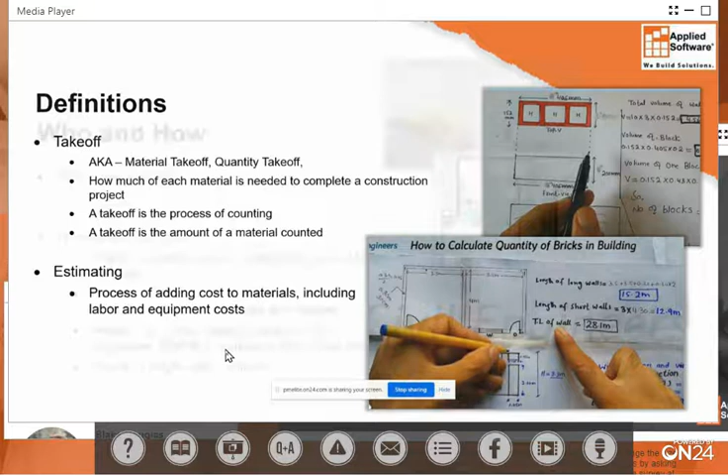It's important that we also associate costs with labor and any equipment. There are many factors involved in estimating, but we need to start out with our drawings and our models to start generating our estimates.

Who uses Takeoff? Estimators and contractors, could be subs or general contractors. Designers typically using modeling software like Revit or Fabrication, Evolve, can get a lot of takeoffs directly from their software. But estimators and contractors don't know how to use Evolve or possibly Revit. So Takeoff is a good way for customers to take advantage of these information-rich BIM models and get quantities from them.

Forever we've done takeoffs using paper, where we just highlight things in color. We've done 2D takeoffs with PDFs. We asked a question earlier about what software you've used in the past, if any. Very common PDFs were used, and electronically you can use different colors and symbols to highlight what's been counted. On the 3D side, you're able to count objects as well.

But again, estimators don't know Revit. So if you don't know Revit, it's hard to get the estimates or quantifications out of it. That's where Takeoff comes in. We can count things like individual objects, lengths, area, and volume.

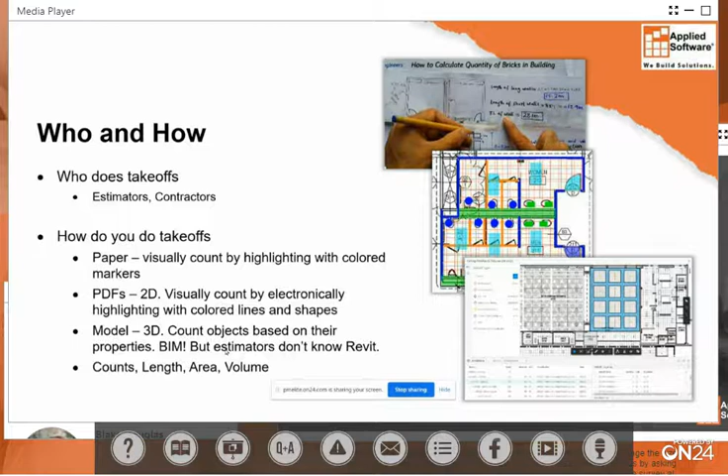The product we're going to talk about today is Autodesk Takeoff. Takeoff is part of the Autodesk Construction Cloud, made up of 4 primary products. Everything starts with Docs, which houses your documents. From there, we can do design collaboration and model coordination using BIM Collaborate. We'll focus on Takeoff today, and I'll show you both 2D and 3D takeoffs. Then there's Build, used on the construction side for managing your project.

Let's first look at setting up Takeoff, and it's pretty easy. You just need to be invited to a project. You'll log into acc.autodesk.com. Let me take a step back - you need to be an administrator for a project. If it's not already set up, as an administrator you can set up a project, or if you're invited to it, you can simply log in. A project does need to be created, and once selected, team members need to be invited.

We then need to configure some settings before we start using Takeoff. From there, I can do takeoffs on either 2D sheets or 3D models, and we create packages to organize what we're counting. Bid packages you can think of like scopes of work. Then we'll perform our quantity takeoff, and finally finish with exporting what we've quantified so we can use that in estimating.

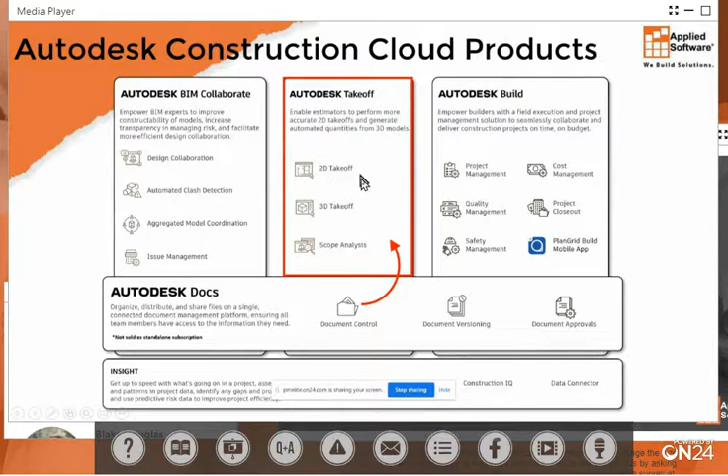So again, I'm looking back at my project, and I see that I'm in Docs. I'll come up here and switch from Docs to Takeoff. This does have to be turned on and activated for people to be able to see it. Once you see Takeoff, you can select it, and it opens up a new interface specifically for Autodesk Takeoff.

You'll notice I've got my help button up here, and I encourage you to review that. You'll also notice I have a menu specifically for Takeoff. It's a little different than what we saw for Docs, so we'll go through a few features here. The very first time you set up Takeoff, you'll get to this first page called Getting Started.

This basically takes you through steps for setting up Takeoff. We first start by setting up a classification system and units of measure. We then upload or publish 2D sheets and 3D models. Finally, we create packages to do our takeoffs. We'll go through those steps, show that quickly here, and review them within the live session.

First thing, we'll start out with defining a classification system. When I do that, it takes me to a new screen, and from here I'm going into settings. Then I pick which units of measure I want to work with, and typically here in the US we work with Imperial. From here I can upload a particular classification system.

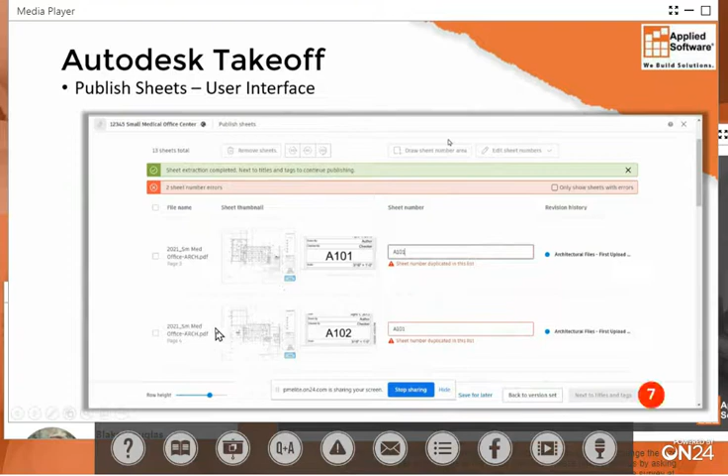By the way, I could also control the height of each row. And finally, I'm just going to move on. After I correct the number, I'll move on to the next step.

I did want to show you one other thing here that I had the option to do. This is a PDF document, and in that PDF document, the first 2 pages is nothing more than a picture of a 3D model. I can't do anything with that for quantification, so I have the option to put a check in there and remove those sheets.

Now I can go ahead and move on to my titles, and make sure the titles - actually one more step here, a little tip I put in. You will notice that it tells me I can proceed on, but you may want to spot check your sheet numbers.

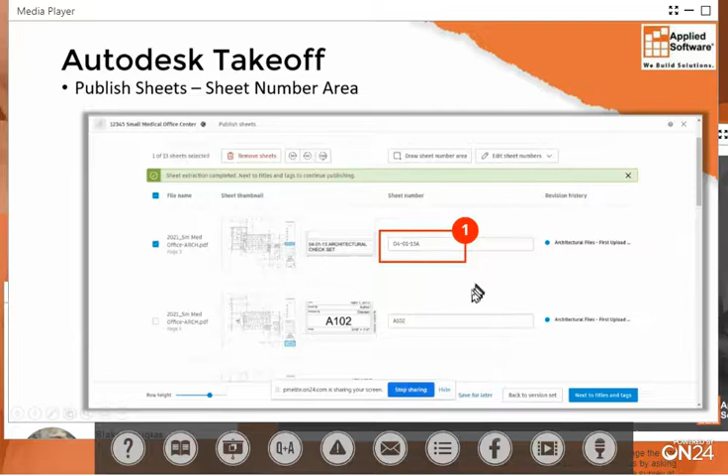Notice it placed the date instead of a sheet number, so it recognized that as being correct as far as being a number, but it's not the correct sheet number. So it's important that we quickly verify the data that is there. I'm going to go ahead and proceed on.

And what we're looking at here is the ability where I can tell it where to find the sheet number, so it knows the correct location to look for it. I'm going to proceed on because I'll go through that a little bit slower for our sheet titles.

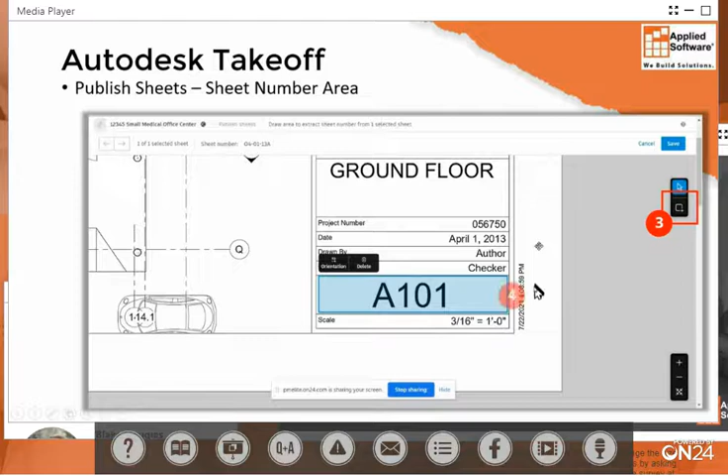When I complete this, it does recognize the sheet number, so now I can proceed on to titles. Now, while it does a great job of finding the sheet numbers and labeling that here in these columns, the sheet titles - we have to tell it specifically where to find the sheet titles.

So one of the first things I would do here is looking for sheet titles, is maybe adjust the row height so I can see more rows. I can select all the files in which I want to look for the title. From there, once I select them, I could hit this box that says Draw Sheet Title Area.

When I do that, it now brings up a sheet, one of the sheets, and it's asking me to specify an area where to look for the title. Now, if you notice right up here, it tells you - there's some little tips in here that are really easy to miss, but it tells you right here to draw an area to extract the sheet title from all 13 sheets that I have selected.

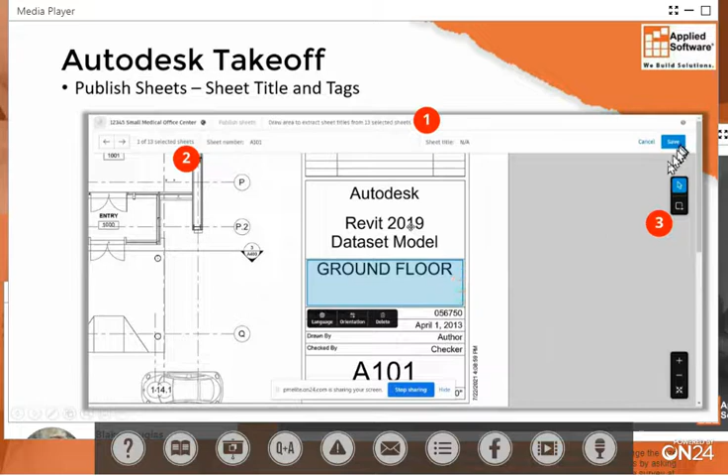Now, I'm on sheet number 1, but I could be on any sheet - all of them will look in the same general area. What I do is simply select this button right over here, pick 2 corners, and it'll find the sheet title. When I proceed on, I'll hit Save, and then we'll see on the next screen that it's recognized the sheet titles. And then I'll hit Publish Sheets.

So when you publish PDF documents into Takeoff, there's a little bit of work that we have to do. It really doesn't take very long, but once it finishes, then we'll end up seeing the 2D sheets appear. The 3D models go a little bit quicker. With the 3D models, again, I can go back over to Files. I can select multiple Revit models, and when I hit Publish, it will automatically publish those 2 Revit models. There's no other work I need to do.

Again, the Revit models have information, they have intelligence about them, whereas the PDF document has no information. We say it's kind of a dumbed down PDF where all I have is the sheet number and the sheet name and what's written on there. But if I touch on an object, there's no properties associated with that object. A line with an arc is just a line with an arc in a PDF, but in a Revit model, that line with an arc could be a door.

So now that I've set up my documents, now I create a package. And when I select the packages, it'll take me over to the package section, and I can create a package. And you want your packages to be pretty focused on what you're going to quantify. So in this case here, if I want to generate some work packages for flooring and for walls, then I can create packages for each.

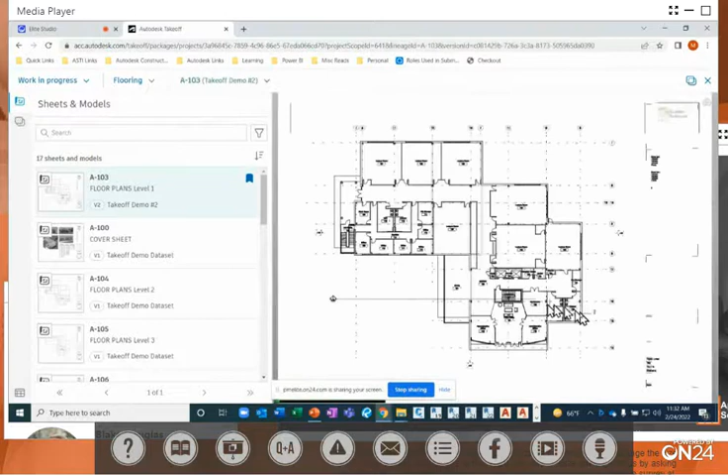So if I come over here and I'm going to select just my first floor, and I'll just zoom in real quick to this area. I'll switch back over to my takeoffs, and I'm going to assume that the majority of this area here has been replaced with carpeting. So I can come over here and I'll select my carpet takeoff. And now right down here, and actually let me move this over to here. Make sure I start my area routine, and with carpet selected, I can come up here and I could select this entire area, and that's going to be carpeting.

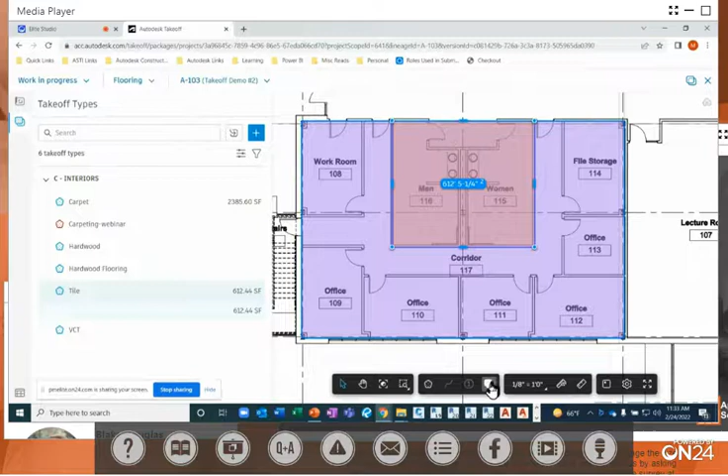Now, I'm not going to put carpeting in the men's room, and maybe not in my workroom, or maybe in some of my offices. So I'll come down here and I'll switch over to tile, and I'll do the exact same thing, and I'll specify an area where to place my tile. Now, when I did that, it didn't change my carpeting. So a nice little feature here, I can select on that tile, and I come right down here and I could say cut out. And when I do that now, if I take this, oops, it's actually cut out that section of area.

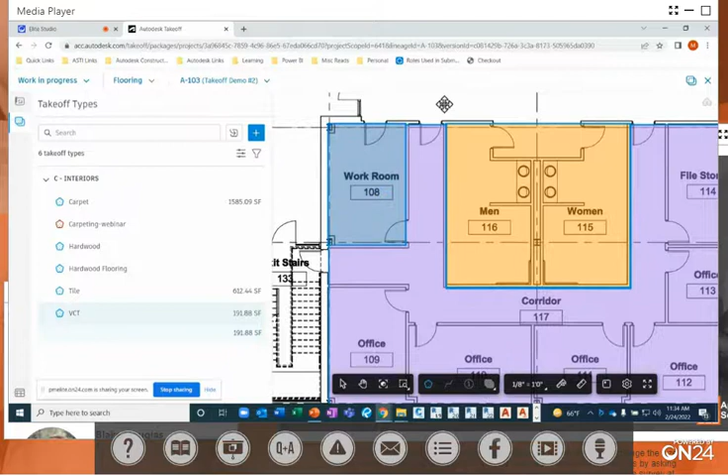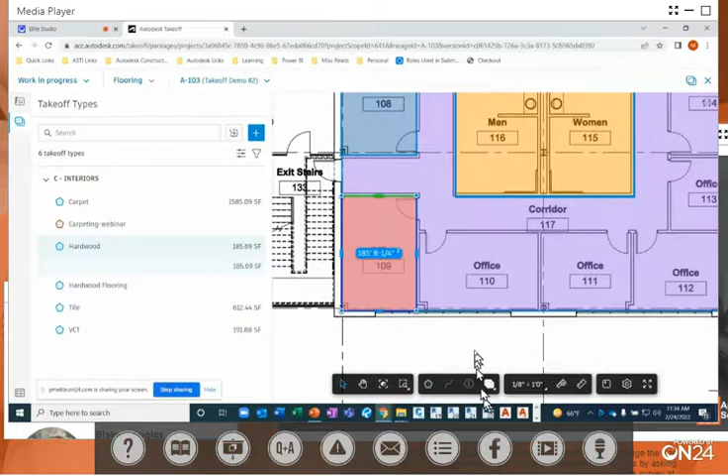So maybe in my workroom, I'll put in VCT, and I'll just do this. And again, I'll do a quick cutout for my VCT. Oops. Escape there, still in there. So very quickly, you can see I'm quantifying now how much VCT, tile, and carpet I have. And finally, I'll just finish this up with hardwood. And I'll just say that in this corner office, we're going to put hardwood. And because I put hardwood in there, I'm going to go ahead and expand that a little bit more. And then I'll just say, cut that out.

And actually, it looks like we found a little bug there. So I'll have to come back there and add my carpet, but what I think I did was I accidentally selected the carpet. Let me just demonstrate that real quick here, guys. It's actually a good thing to point out. When you select on an object, make sure you don't select the wrong object. I'd actually accidentally selected the carpet. So now when I come in here and I select on this hardwood, I can go ahead and remove that. I can click on the workroom and I can remove that.

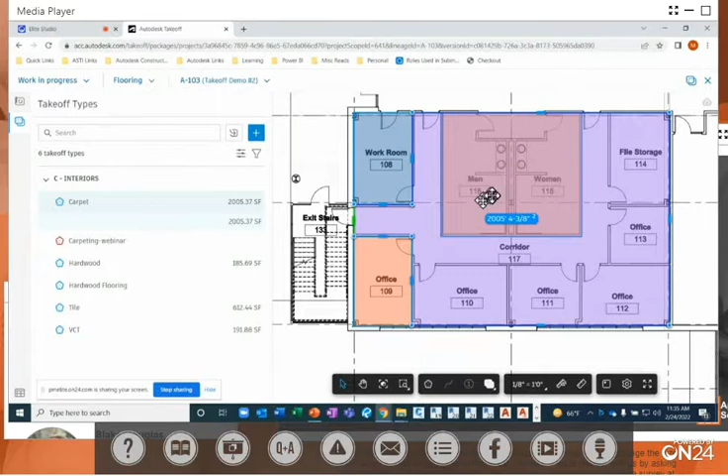And one other thing I can do, I had a little tough time selecting if they're overlapping. You can come over here and I could turn off this carpeting here. I'll turn that off. Now I come in here and I can actually select on that tile, or I also have the option, if I need to select on it, I don't know why, but my mouse is stuck here. I also have the option where I can actually select on the tile this way. And sorry, my mouse is actually stuck, so I apologize for that. So we're going to go ahead and turn that off real quick. I'm going to select that, turn that back on, and then I'll go ahead and cut that out.

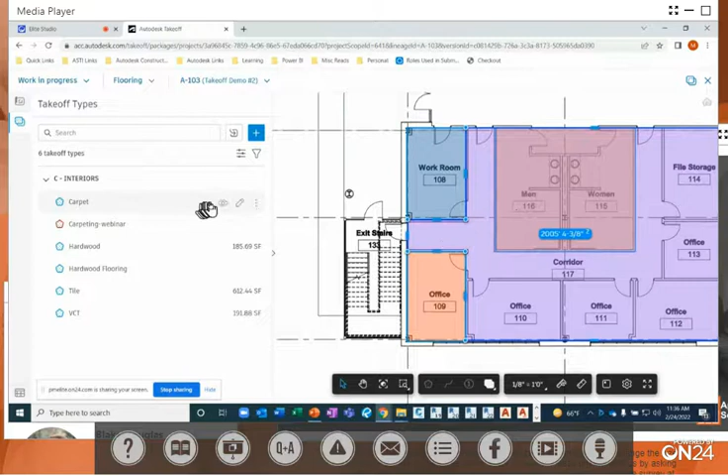And actually, it's not letting me, so I will do one other thing here, just to make this a little bit easier on myself. And the beauty of live demos. So we'll go ahead and do this. And I should be able to cut that out now. Boom, there we go. And I'll pull that back down.

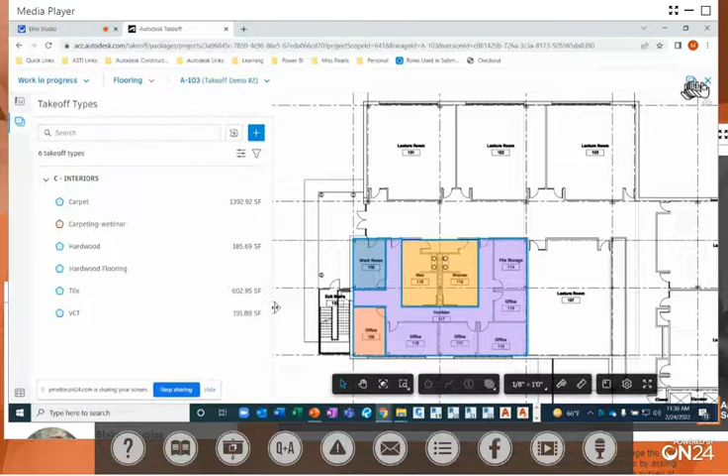So, all right, real quick, I can do my 2D takeoffs. I showed you how to do this, specifically for flooring. What I want to do is switch to a package where I have a lot of information and then show you what we can do with it. So I'm actually going to exit out of my flooring package, and I'm simply going to go into this package. Now, I purposely created this package to show everything that I've quantified. I've quantified structural, I've quantified architectural, I've quantified some mechanical.

What I wanted to show you here is if I scroll down, you see a list of all of the different objects that I have quantified. And I have all these different takeoff types. I have a total of 56. And what I think I will do here is I'm going to select on here real quick.

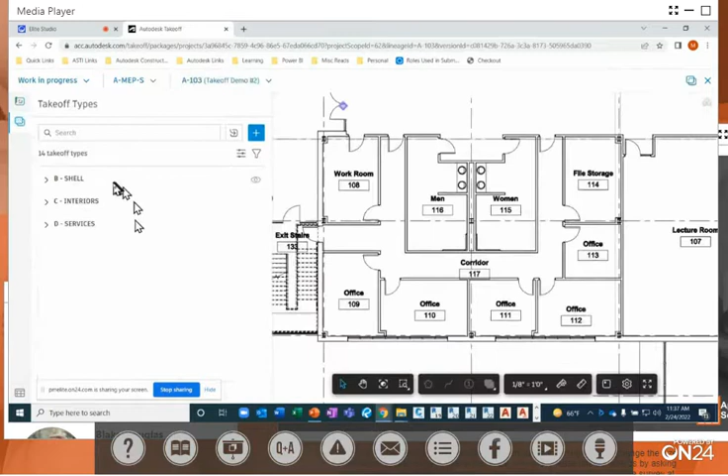If you notice, when I expand on this B shell, notice it's only showing me 2D takeoff types because I have a 2D document. Watch when I switch over to a 3D model. And now I switch to takeoff types. Now it's showing me actually all my takeoff types related to a 3D model. There we go. And so if we scroll down and we look, we can see everything has this symbol next to it that represents that's a BIM takeoff.

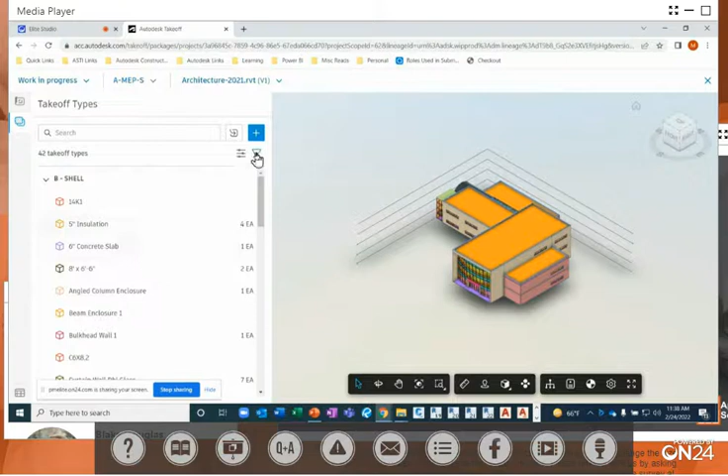So notice I've got a lot more information here, got a lot of stuff dealing with the interiors. I do have some structural in here on purpose, again, just to create a lot of different objects. Because I want you to understand with our BIM files, there's a lot of data. And so we should get comfortable with using different filters that might be available. And so I come in here and I say, you know what? I don't care about anything dealing with the shell. All I want to see is the interiors.

Now, if I just compress this really quick, I've got those three. I'm going to come in here and I'm going to filter it. Say, just show me interiors. And so immediately that's what I'm left with. So now I have takeoff types. I can start quantifying these particular objects.

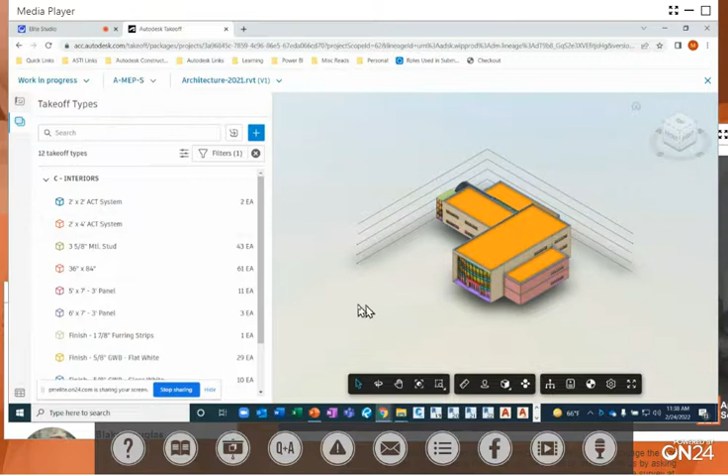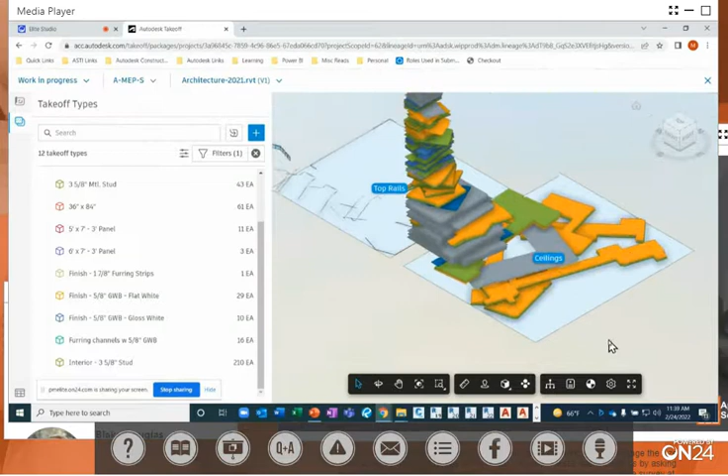Now, if we take a look, I've already quantified some things like some ceilings and some walls. You can see as I scroll down the different objects that I've quantified. I'm going to switch over to this cluster view, which is really helpful. And as I scroll down and take a look, and I'm going to focus on ceilings right now, I can see just by the colors, because anything that's a dark gray hasn't been quantified. But it looks like I've counted a bunch of ceilings.

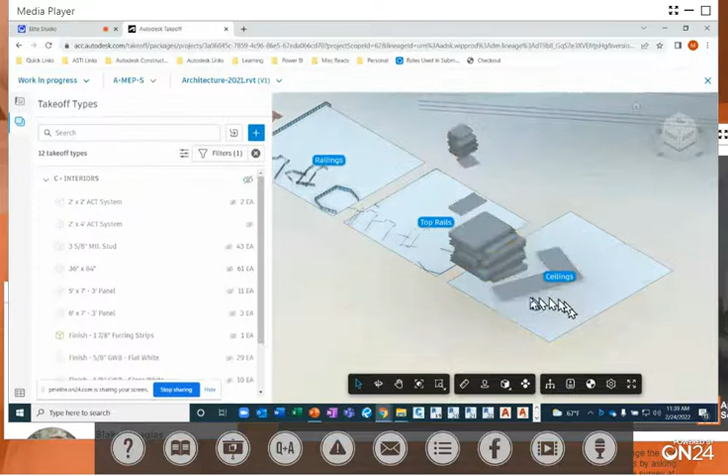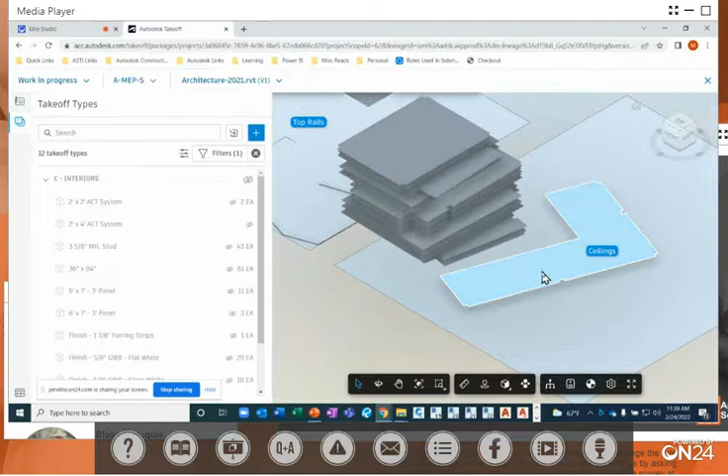Well, a really nice handy tool here is I'm going to come right over here where it says interiors, and I'm going to turn off anything that's already been counted. And when I do that, notice I just have a few ceilings left. So I know I have not counted this ceiling. Well, we saw when I was doing a takeoff in 2D that I did an area takeoff. Well, if I select on this, I now can come up here and I can say, all right, let's start counting this ceiling. And if I right click on it, it tells me that's a 2x4 acoustical ceiling tile system.

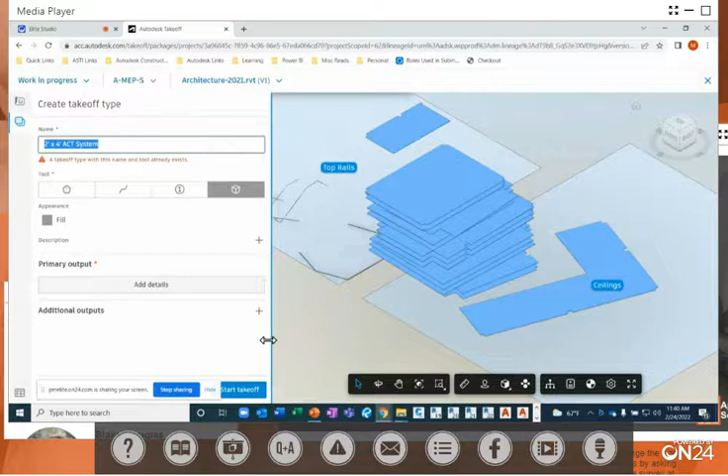I want to select all of them. And notice it highlighted all of those that we see that are left. All right, great. Let's count it. Right up here, I'm going to hit the plus sign, and it automatically knows to name it. It says, hey, this is what it's called in Revit. I'm going to call it here in Takeoff. But then notice it tells me right below there, it says, hey, there's already a type in here with the same name.

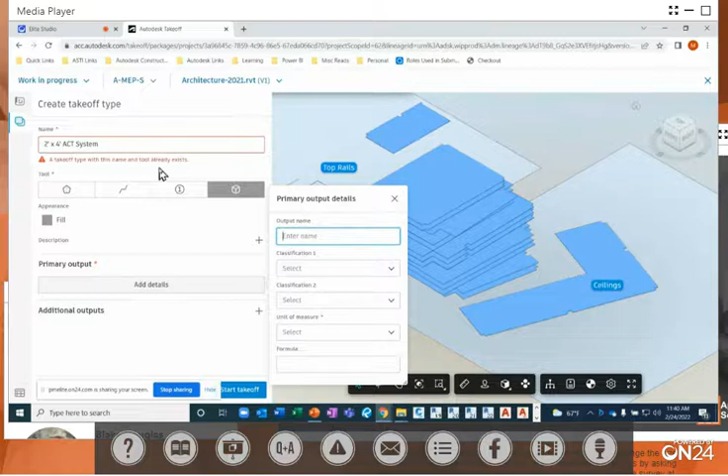So I know what to go look for. I don't have to create a new one. I don't have to come in here and look for the classification systems. I don't have to fill out the unit of measure. I just will go and look for this one, and I'll use that as my takeoff type. So I'm going to move this over here. I'm going to hit cancel. And right here is that takeoff type. So that's the 2x4. And I'm going to hit check.

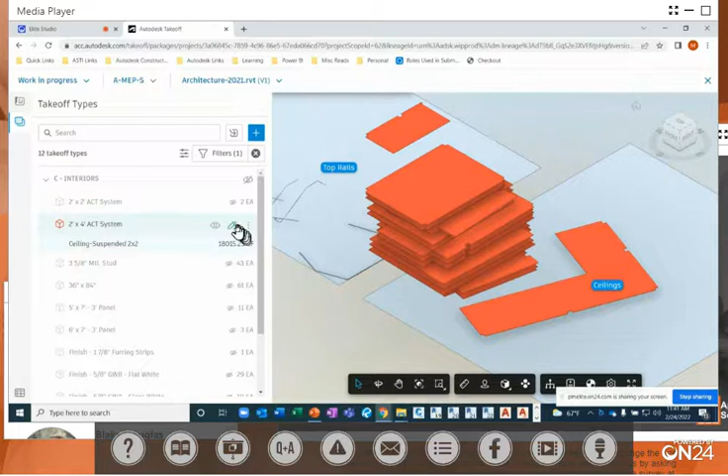And now we'll see that it's disappeared. Let's turn that back on so we can see it. Notice it's changed colors. And it tells me right down here when I select on it just how many square feet of 2x4 acoustical ceiling tile I have. And if I expand on this, I can see what's already been filled out. There's the name, there's the color. Come back in here. Here's the classification systems. It's already been set to area. So it's already done the calculations for me.

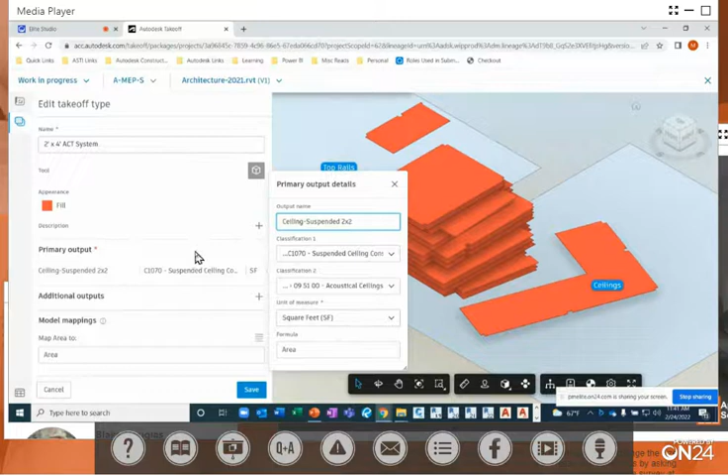So the first time you will have to spend a little time configuring your different takeoff types, assigning them classification systems, assigning them units of measure. Once you do that, then you can use them over and over again, and getting your quantities can be pretty quick.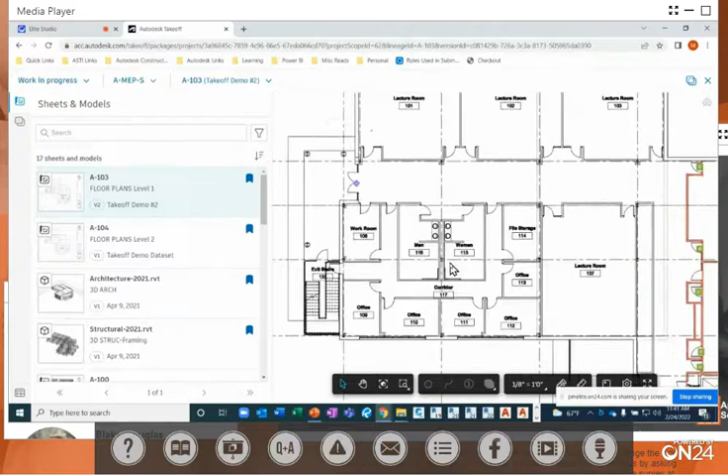Now I'm going to switch to a 2D floor plan because I started out with the 2D takeoff and I forgot to follow up with the 3D takeoff. I went to 3D and then I want to go back to 2D just to show you a couple things here. This is the same floor plan we saw before, just to show you how quickly I can start doing my takeoffs.

So now what I can do is I'm like, all right, these walls right here, I'm going to say that these are all metal stud both sides. And now I just simply start counting. Come over here and I'll just click. And I'll just continue around like this.

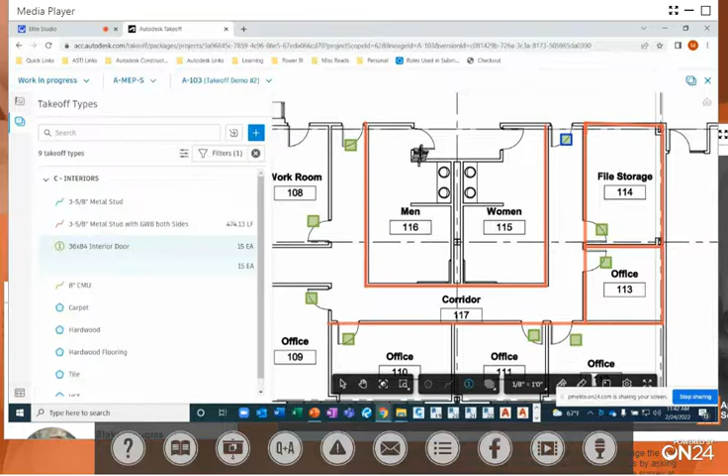And just continue here, and I'll just put in a few more here. So that quickly, it's already there. It's already telling me how many linear feet I have. If I want to start counting my interior doors, I'll simply just come over here, select interior door, and I can start counting those. And again, if you have different interior doors, metal, wood, security, whatever, just create a different takeoff type. And all you have to do is select it from the menu and you can continue on.

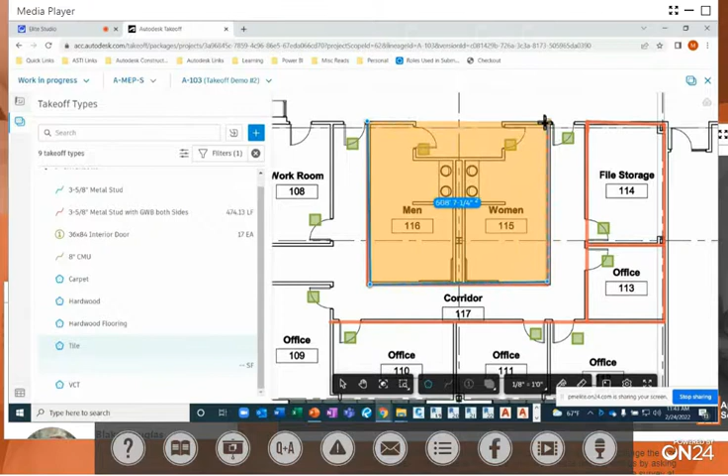Notice I can scroll down here and I can say, all right, let me go ahead and select my tile flooring. And I'll come in here and I'll just go ahead and select where I want. Oops, I'm going to come over to here. Like this. And I've selected my tile flooring. So very easy to go ahead and select those different takeoff types. And I'm doing all this with just 2D takeoffs.

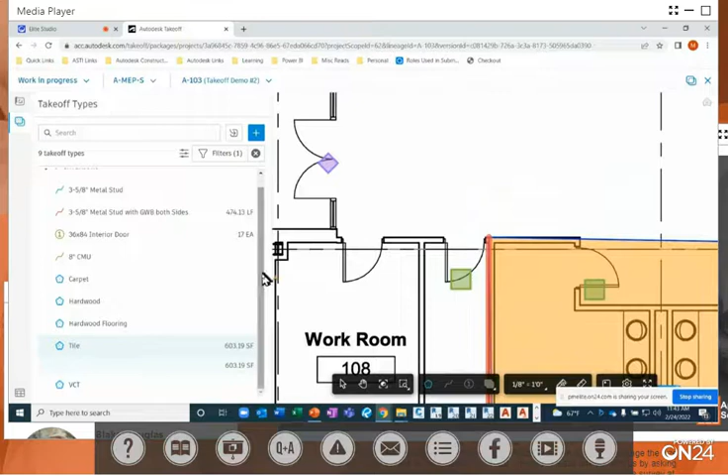If you want to change the symbol of any of your takeoffs, notice I've got right up here this double door, then my single door. They have a different symbol associated with them. So if I click on this single door, then I'll come over here and I'll say, you know what, let's change it from a square to a circle, and we'll make that color red, and we'll make this outside a light blue. I'll hit save, and then you can see all my doors have been updated. So real quick, I'm quantifying on the fly. I can do that in 2D. I can do that in 3D.

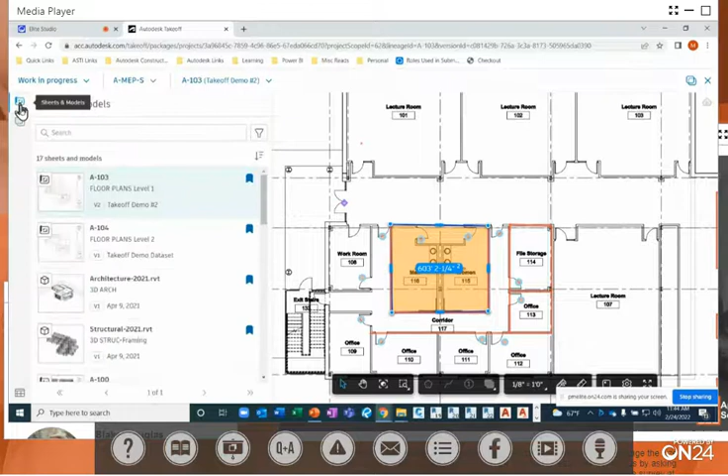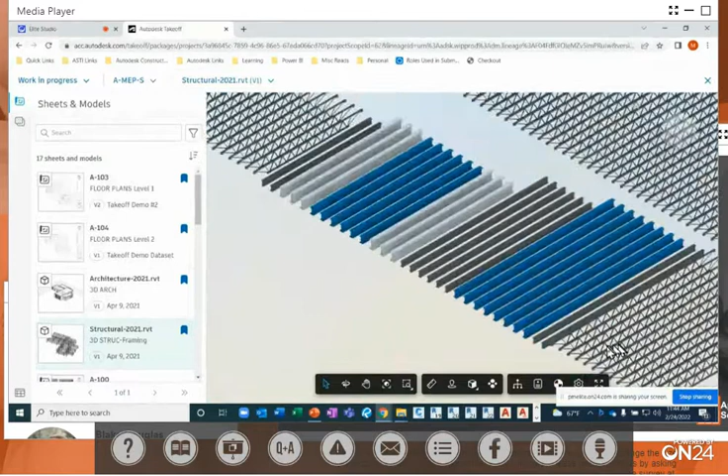One more thing I want to show you dealing with formulas. I'm going to switch to a structural file. Here's my structural model. Again, the quick and easy way to work on this is to go ahead and cluster this. If I zoom in, I can see that I've got some objects that are in color, some that are not. So I'm going to take a look at my takeoff types here, and I'm going to switch this to just show me my shell. And if I take a look, I can see I've got different systems in here. And what I think I'll do is I'll set this to go to levels 1, 2, and 3.

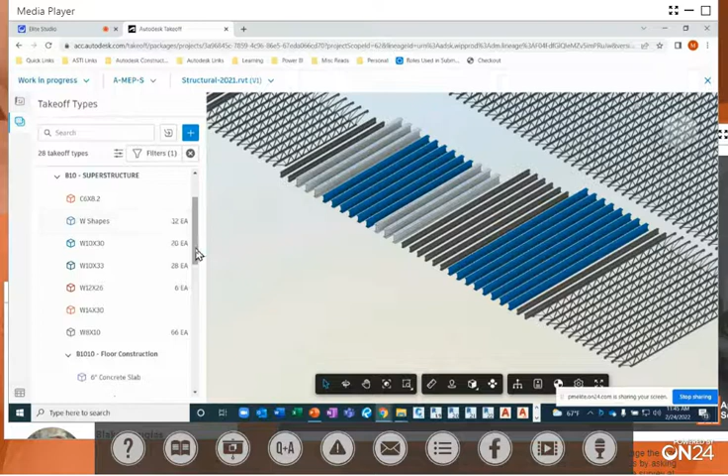Because notice now I have under my exterior vertical enclosures, B20, I've got a section 2010. Well, I'm not going to do anything with walls, so I'm going to compress that. But as I scroll down, I will actually scroll up. There's my superstructure right there. Those are my columns and my beams. Well, notice I've already counted some. Well, let me go ahead and just turn off everything and see what's left. I'll turn them all back on. So here I can quickly visualize what's been counted and what hasn't.

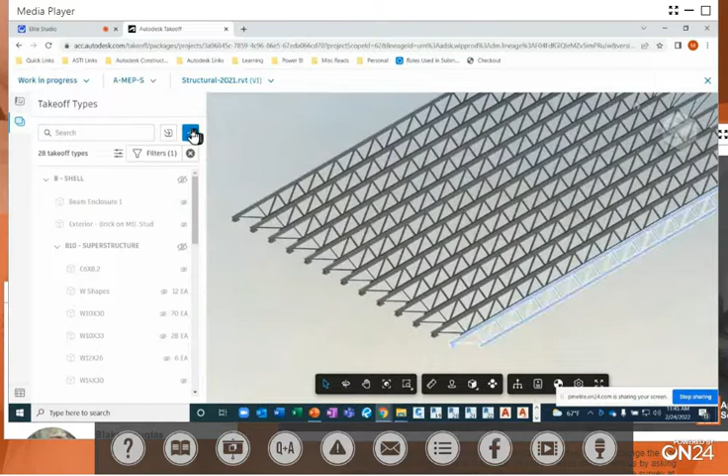So maybe I'll start out right here. I will select this bar joist, and I'll zoom in, I'll click on it. Come back up here to start counting it. It's a 14K1. It says, wait a minute, you've already got one in here. All right. If I scroll down and I'll look for my 14K1, and I've got it right here. I'm going to go ahead and turn that on so I can see it. But I'll tap on this, and I'll right click, and I'll say, all right, let's select all of them.

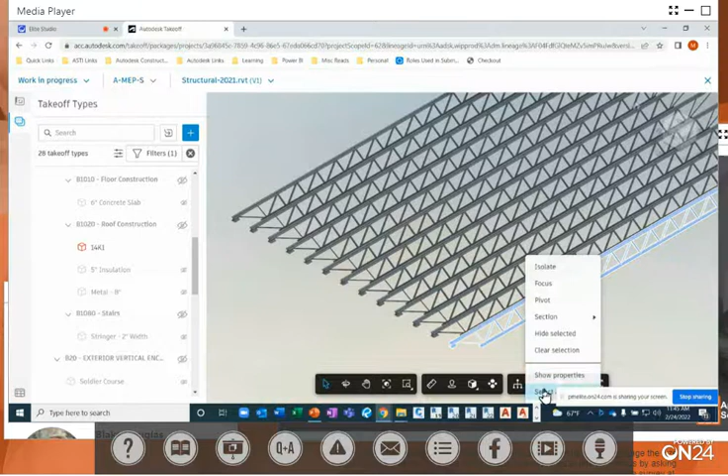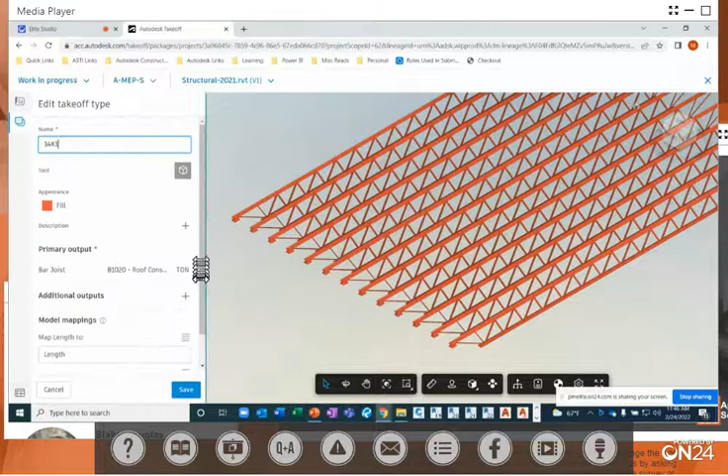And now I can come over here, and with this selected, I've got 167. I will count it, and now I've got a total of 167 of them. But notice right now it's trying to calculate the weight, and it's unable to calculate the weight. And if I come in here, you take a look, it's determining the weight based on the length of each bar joist and also the weight of each bar joist. Now, with some systems, the weight's already included.

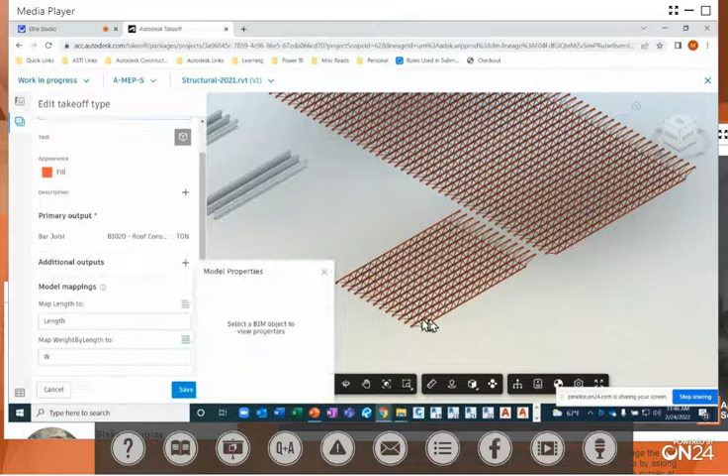So if I actually click on this button right here, this will show me, once I select on an object, boom, the different properties that are available. And when I hit View More, you'll notice if I scroll down, weight is not included in that bar joist, right? Oh, actually there is, right there. There's WT. W is not included, but the WT is. So all I have to do is I select on over here and I change this to WT.

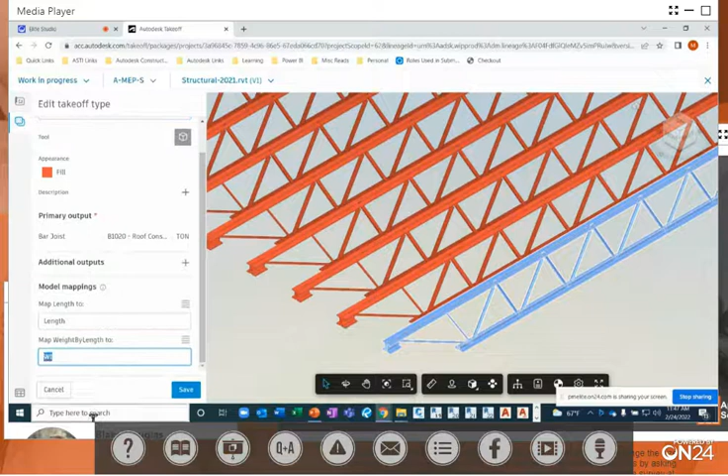I'll pick on it and I'll hit save. And now notice when I hover over this, it calculates the tonnage for me. Now, one last thing to show you: if you wanted to, you can also enter in a number in here. If I type in the number 5, it would still calculate the tonnage. So if the parameter is there, you want to tie it to the parameter. If it's not, you can enter in a specific number.

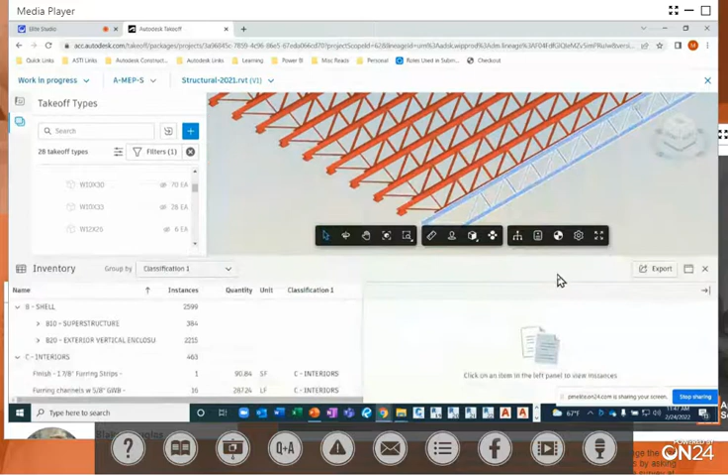All right. I've been in here and I've been counting objects. I just want to show you what the report looks like. If you come down here in the lower left-hand corner, you'll see it says inventory. Normally I pull this to another screen, but I'm unable to do that with the webinar, so I'm going to maximize this here, and we'll see everything.

So real quick, your inventory can be set up or organized 5 or 6 different ways here. By classification 1, there's my B, C, and D groups. Go to classification number 2, and you can scroll down and see the different items that have been counted. I can actually filter this by the document. These are my 2D sheets, A103 and 104, and we can see what I quantified on those individual sheets.

Then I come down to my Revit model, and I can see what I've quantified in the 3D. So I could do takeoffs on both 2D and 3D and get that information in a single report. Now with any of this, if you click on an item, you have an option to expand on it and see some details. I'm going to jump back up to classification 1 to do that. Actually my mouse is not clicking right now for some reason.

Let's take a look at the other takeoff types. I'm trying to compress that, but the mouse is locking up. So we can organize this by all the different takeoff types. It's not organized by anything else except by the takeoff type. And finally, the last one here is location.

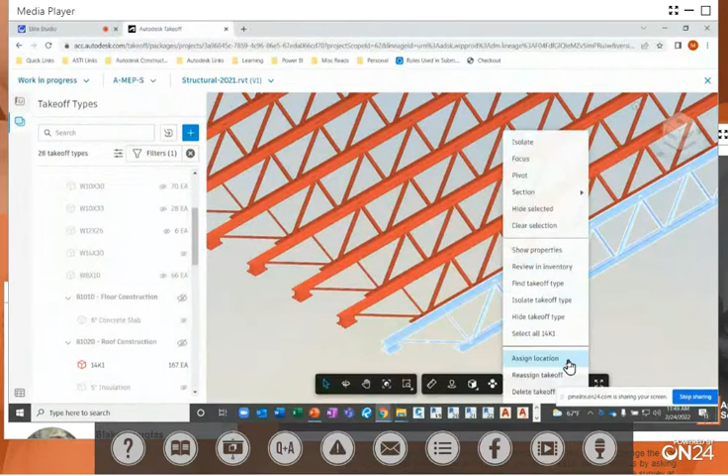None of these objects have been assigned a location, but if I go back into any of these and right-click on it, you'll see an option that says Assign Location. So you may want to use locations like per floor or per certain areas of a building. If you want the ability to sort your report by location, you can assign a location that way.

Now, as far as, yeah, this is just not, there we go. Looks like I had to close it up. Here's what I was trying to show you before. Here's this bar joist that I selected. I think I have to restart my computer because we were just looking at a list there and it's just taking a while. One more time. All right, there we go.

So there's my 14K1 bar joist, and I can see each individual bar joist. So you can itemize each one, and I can tell by the length and the weight how they're adjusting accordingly. By the way, I'm trying to click with my mouse, but it's not working. But when I select on it here in the inventory, it actually selects it back in the model.

So it's really helpful when you have a split screen. You've got your inventory list on one screen, you've got your model on the middle screen. If you need to select specific objects, you can come in here and select them from your inventory.

Now, I will then go in here and export. I'm glad I downloaded these earlier. These are the Excel files which I've downloaded. When you download it, it won't name them accordingly; it will just name it Excel download. But I named these on purpose. So if I select on classification 1, we can see what this looks like.

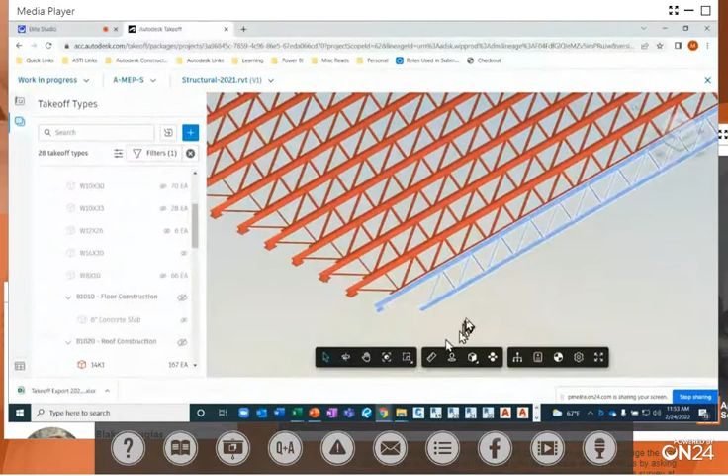Yes, there are. I'll go ahead and go over to the questions slide. First, it looks like we have a question from James who asks, can Takeoff link to an estimating program?

Currently right now it cannot. So we have to export to Excel, and that Excel file we would either link or import into an estimating program.

Next we have one from Levi who asks, will Autodesk add estimating capabilities to Takeoff? That's a good question, I don't know what the real answer is to that. I think what Autodesk has done in the past will kind of still be laser focused around quantification, but I think that is the intent. I think what will end up happening is they'll probably, with a third-party program, figure out a way to link that in, so that maybe while Takeoff is not doing the estimating, there will be a live link with an estimating program.

Next, Sylvia asks, how can I take off an AutoCAD file? So with your AutoCAD file, you will have to export out to a PDF file and then do a 2D takeoff on that PDF. If your AutoCAD is in 3D, like Fabrication CAD MEP, you can get takeoffs directly out of there.